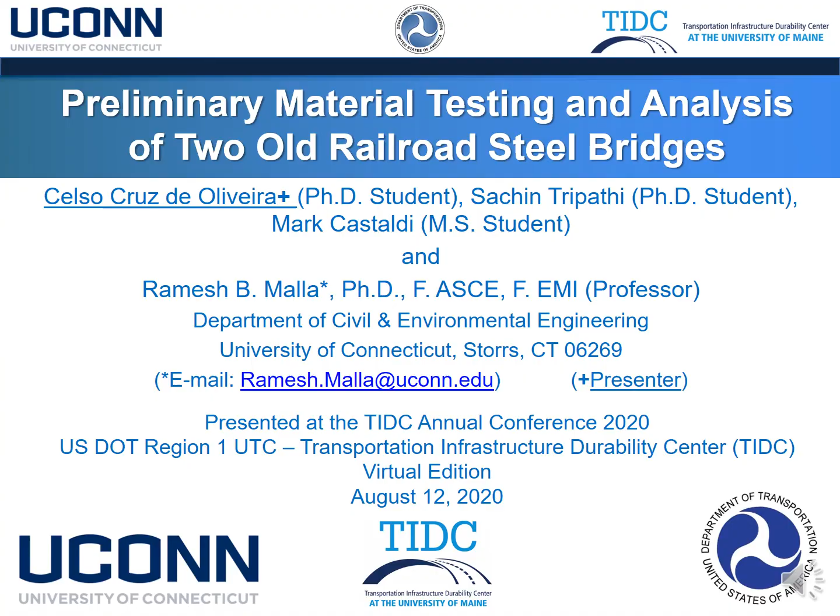Background and importance: passengers and freight trains are important to maintaining a thriving economy, especially the Northeast Corridor, which expands from Boston to Washington, D.C. Maintaining a viable railroad system in New England is expensive and requires constant infrastructure upgrade, improvement, and eventual replacement. Since a large percentage of New England's railroad bridges are old, research is needed to better extend the safe life cycle of those old bridges, especially along the passenger route.

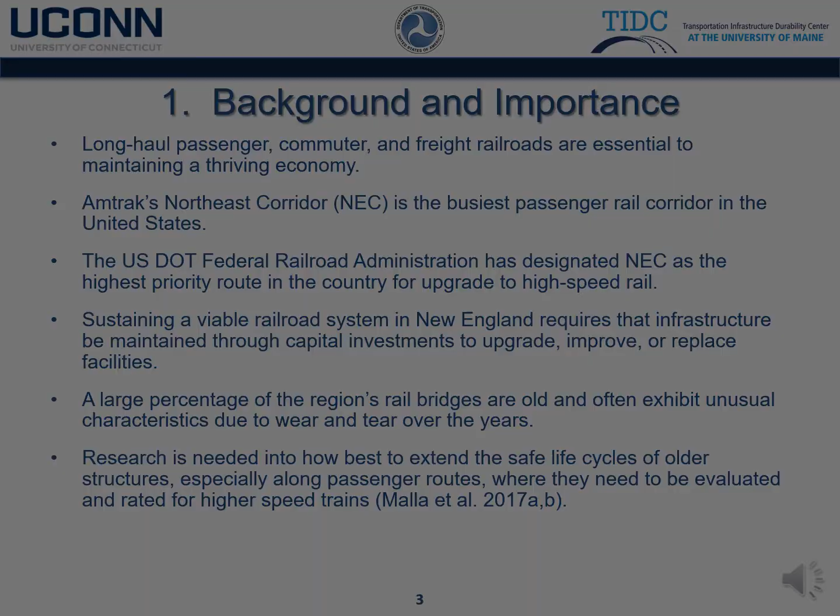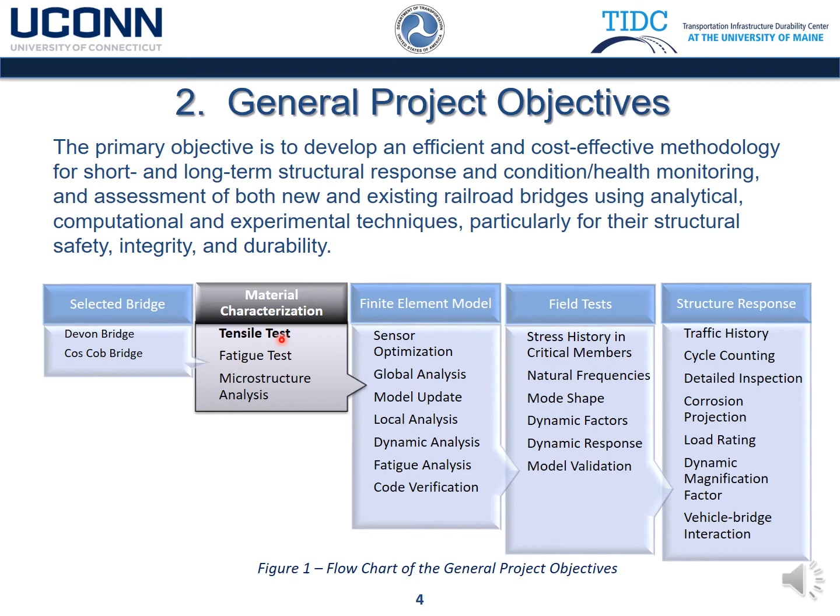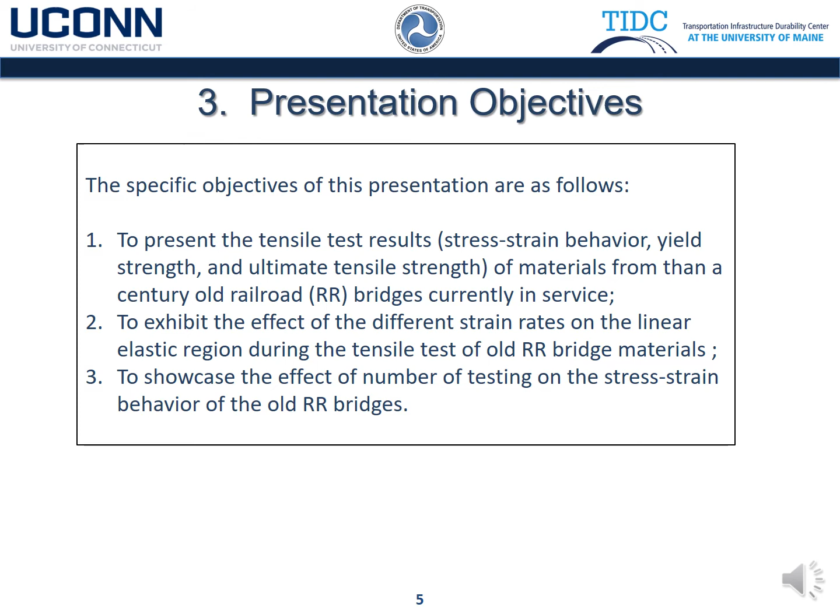Presentation objective: the specific objectives of this presentation are to present the strain stress behavior and the effect of different strain rates during the tensile test from the material of the selected bridges.

Introduction - bridge selection criteria: the first criterion is structure type, where steel trusses and open deck were desired for simplification purposes. Second, the bridge should be built using ASTM A7 steel, therefore built before the 1940s. To better understand the dynamic effect of the bridge, at least a 100 foot span was an ideal structure. Lastly, the train type and location helped narrow the bridge selection.

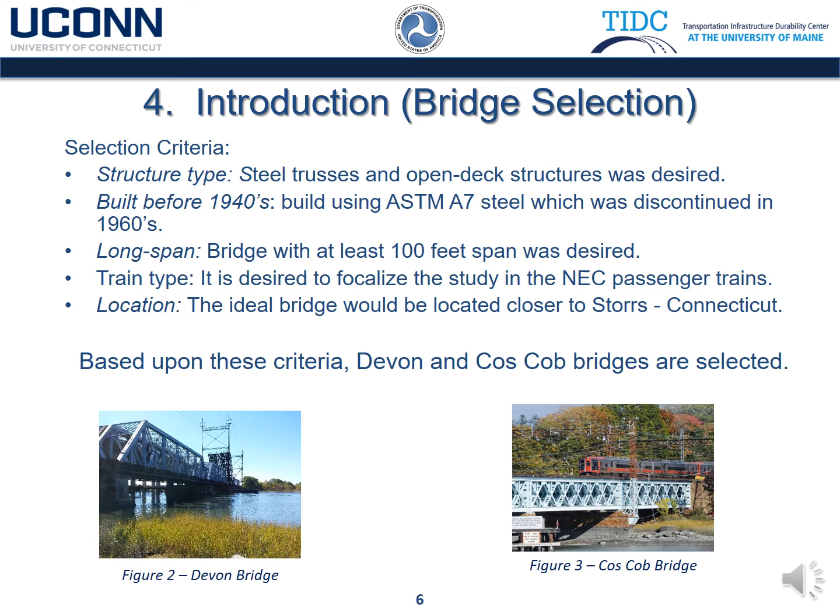Based upon the mentioned criteria, Devon Bridge in Figure 2 and Cos Cob Bridge in Figure 3 were selected.

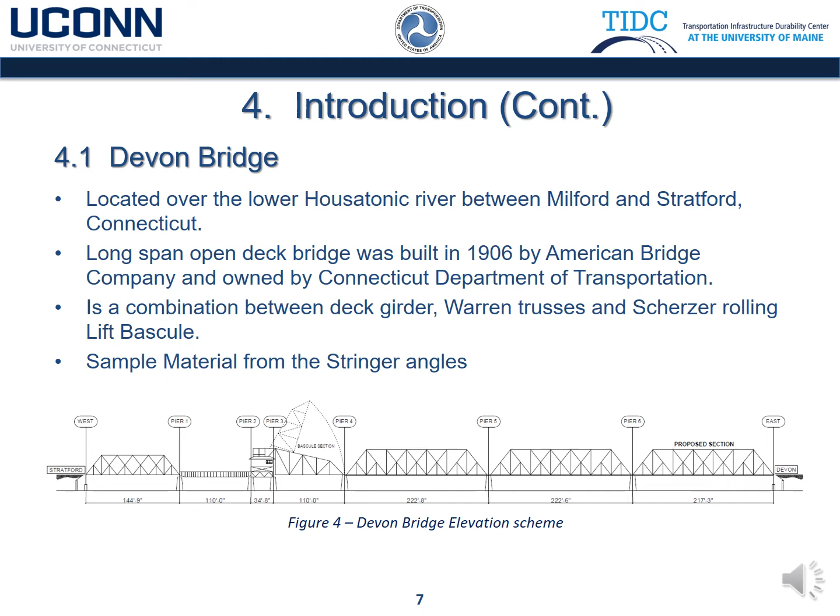Devon Bridge is located over the lower Housatonic River between Milford and Stratford, Connecticut, and it was built in 1906 by American Bridge Company. Devon Bridge has 7 spans and is a combination of deck girder, Warren truss, and Scherzer rolling lift bascule. The sample material is from the stringer angle web that was replaced during renovations.

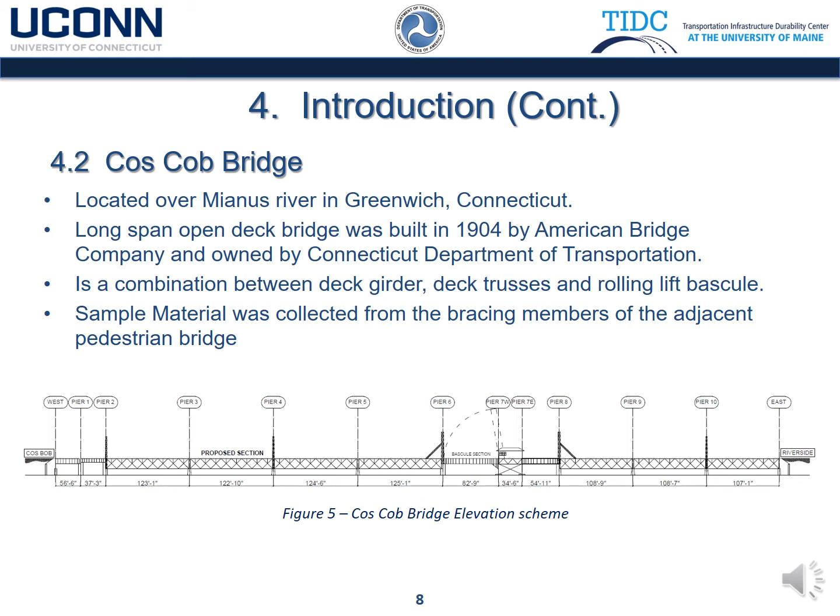Cos Cob Bridge is located over the Mianus River in Greenwich, Connecticut, and it was built in 1904 by American Bridge Company. Cos Cob Bridge has 12 spans and is a combination of deck girder, deck trusses, and rolling lift bascule. The sample material is from a bracing member of the adjacent pedestrian bridge replaced during renovations.

With the background and introduction presented, it leads us to the research question: what is the current status of these more than a century-old railroad bridge materials?

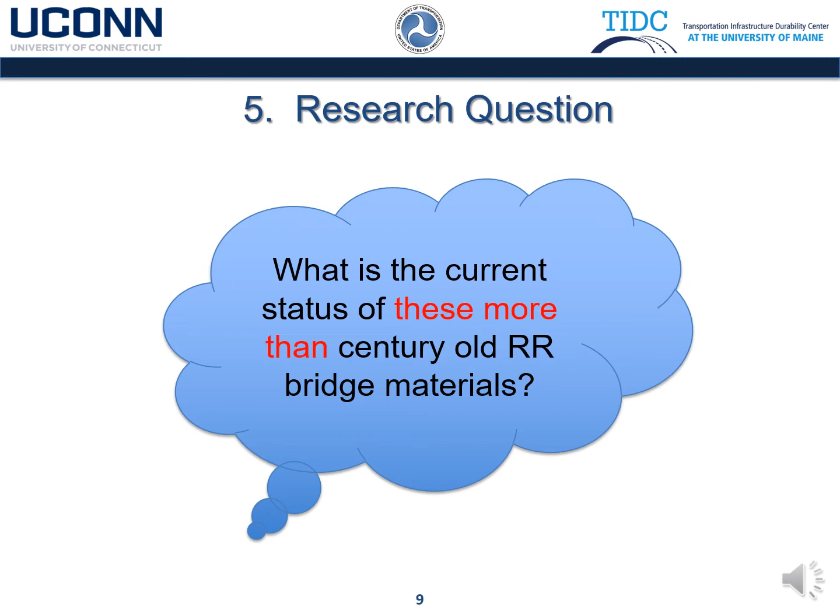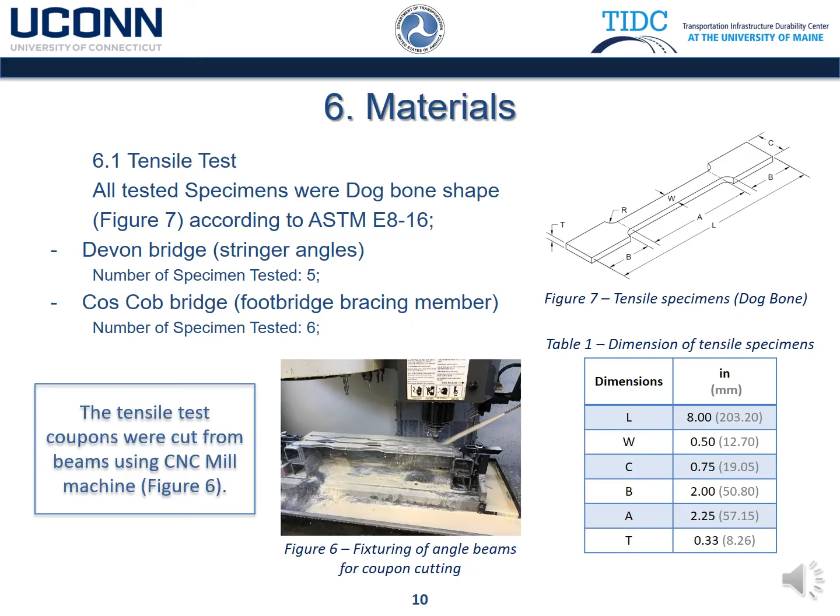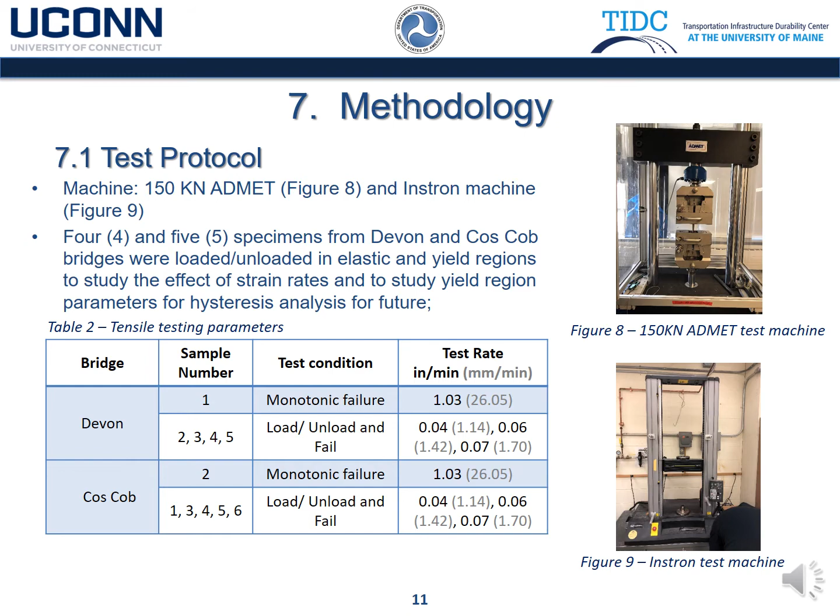This process allows us to understand the effect of strain rates and study the yield region. A similar test protocol was adopted for Cos Cob Bridge, with 1 specimen subject to monotonic failure and the remaining 5 specimens loaded and unloaded through failure. Table 2 shows the summary of the test parameters.

ASTM A7 steel literature review: since the ASTM steel was discontinued in 1967 and few mechanical studies have been made, literature review was the first step. Two documents were used for that purpose.

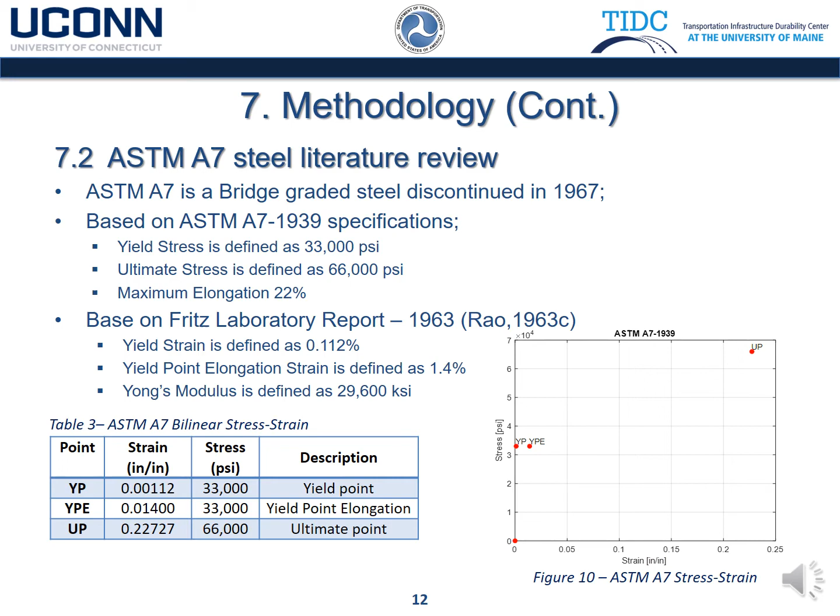The first is the ASTM specification from 1939, where the yield stress, ultimate stress, and maximal elongation were extracted. The second literature is the Fritz Laboratory report from 1963, where the yield strain, yield point, elongation, and the Young's modulus were extracted. With that information, Table 3 was compiled, and the 3 main points are represented in Figure 10. The yield point, elongation, and ultimate point will be used as a baseline comparison with the test results.

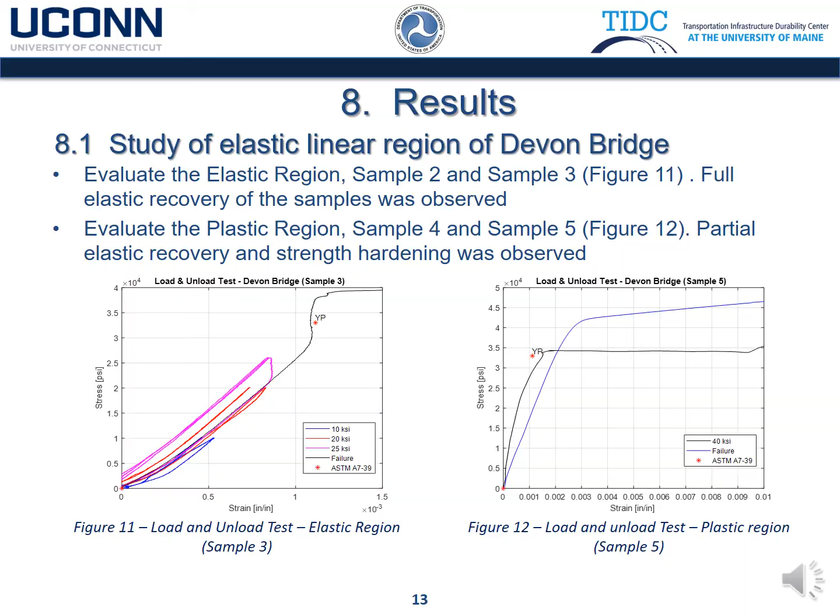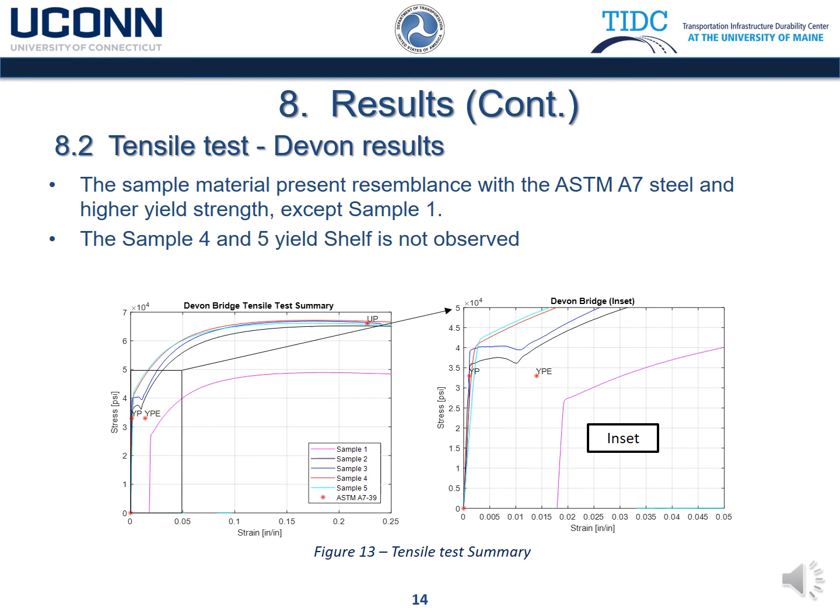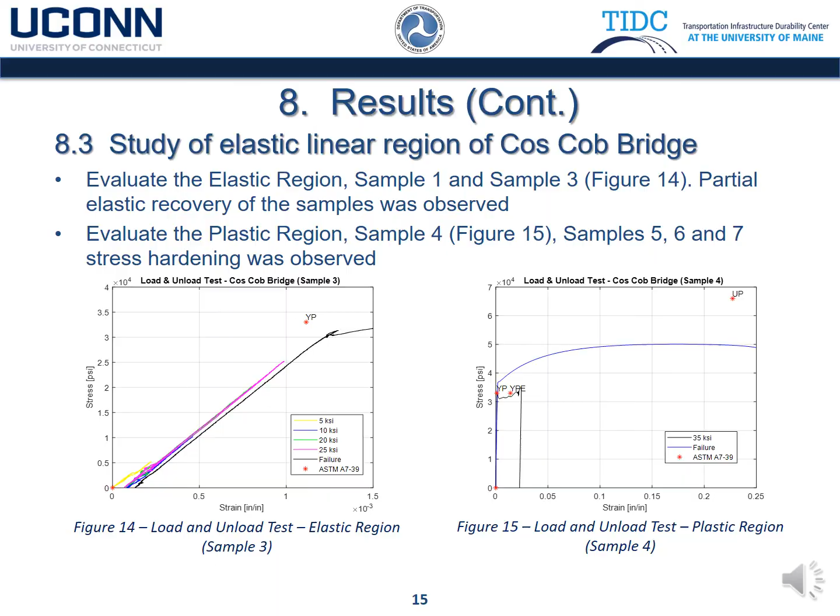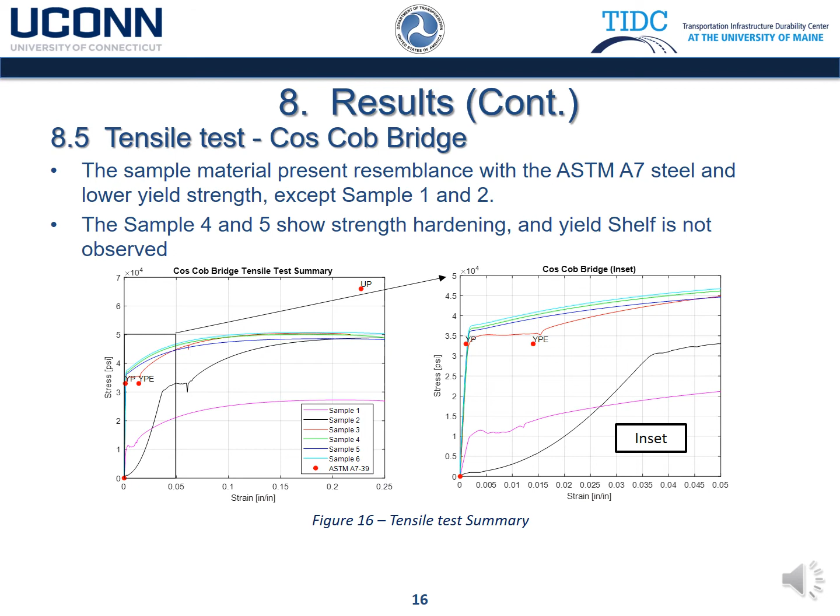Tensile test, Cos Cob Bridge. As we can see on the left side of figure 16, the test material shows some resemblance with ASTM A7 steel, except the ultimate stress, which shows lower values. The right side of figure 16 shows the inset of the elastic region, and similar to Devon Bridge, we can observe that sample 4 and sample 5 don't show the yield shelf.

Specific observations: effect of strain rate on test results. From 4 specimens from each bridge that were loaded and unloaded, it has shown that the strain rate does not affect the test results, as long as it's within ASTM specifications.

Effect of number of testing on the test results. After the material gets loaded to the plastic region and unloaded, the yield shelf was not observed and strain hardening was observed. This behavior is expected for most metallic materials.

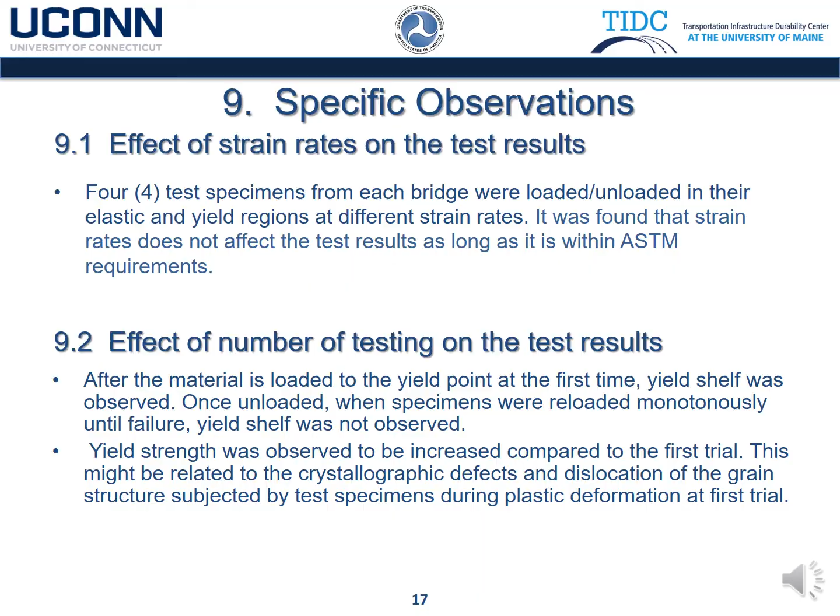Conclusion and application. With the presented results, we can conclude that the test material has maintained its elastic yielding, plastic deformation, and strain hardening characteristics.

With a limited number of specimens, Devon Bridge material has maintained the ultimate tensile strength, while Cos Cob Bridge exhibits a lower value in comparison with the ASTM A7 specification.

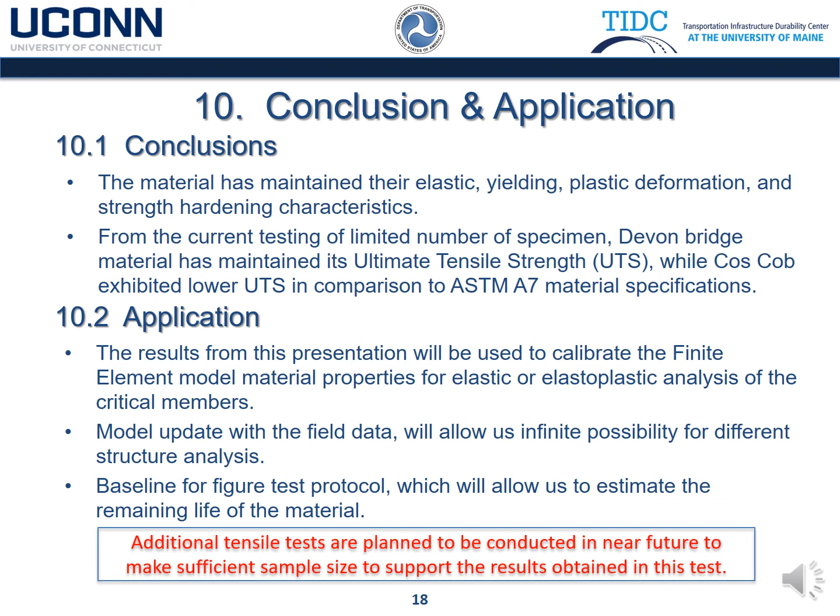This result will be applied to calibrate the finite element model and eventually use this calibrated model for different structural analysis. Similarly, the result will be used to establish testing protocol for fatigue analysis. In the near future, additional testing will be conducted to support the results obtained in this presentation.

Ongoing tests: fatigue test. Specimens for force control fatigue tests are ready to be tested under the elastic region. The test protocol will be defined by the ASTM E466 standard, and the ultimate goal is to create the SN curve, which will help us estimate the remaining life of the material from the selected bridges.

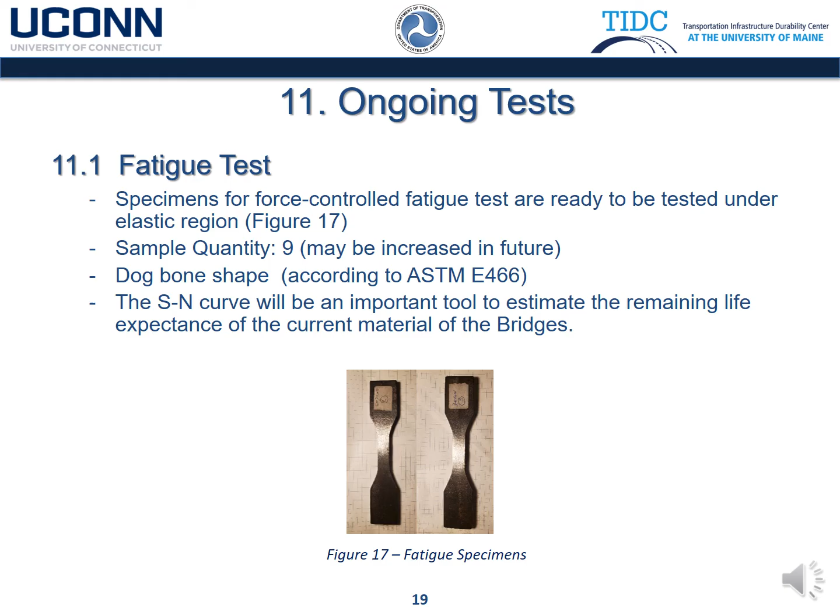Microstructure characterization. Specimens for microstructure characterization are ready to be analyzed. The test protocol will be defined by ASTM E1282, and the specimens will be analyzed before and after the failure.